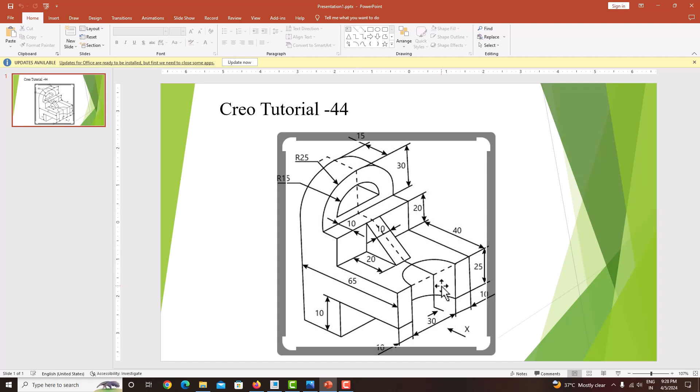While modeling this component, I will start with the left side sketch, then extrude it up to a length of 50. Then I will remove the material here, then create this rib. Finally, I will remove material from this one and this one. After doing these steps, we will get a model like this.

This is the final model. Now we will learn how to create this model using Creo Parametric.

Just go to file, close, new, part, solid, untick 'use default template', provide a name, save, OK. Now our dimensions are in mm, so choose the mm template: mm part solid absolute, save, OK.

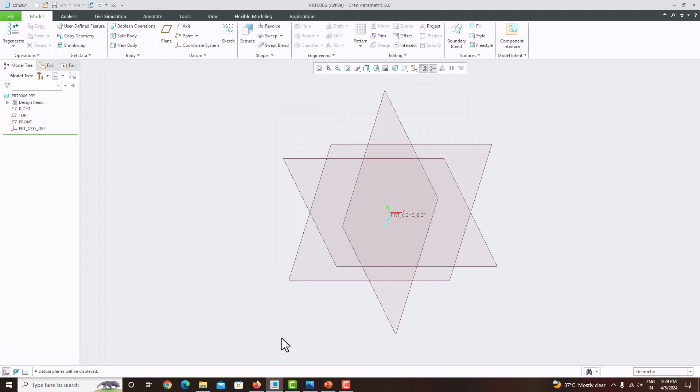Switch on all the planes. For easy drawing, I'm just going to keep it like this. First, I'm taking the front plane, sketch view.

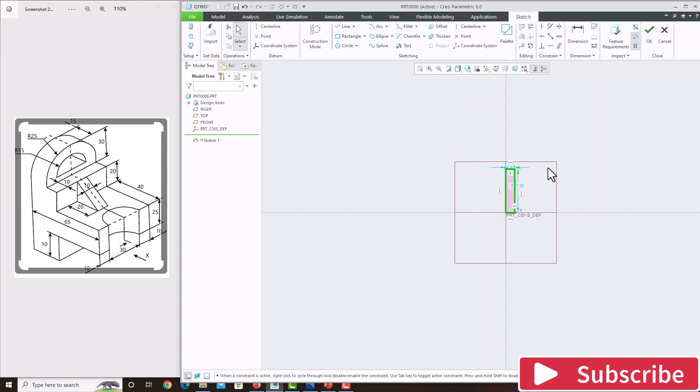Now I will start with the rectangle, take the corner rectangle, put it like this. The total height has to be calculated from here: 30 plus 20 plus 25 plus 10. So just add it like that: 30 plus 20 plus 25 plus 10.

The height is 85, and the width also we have to calculate. The total is 65. From 65 just minus 40, that is 25.

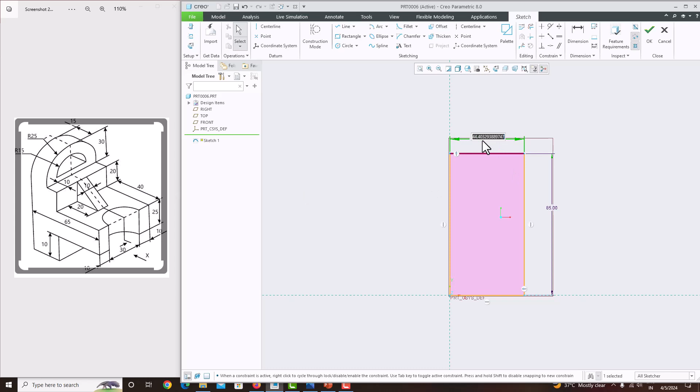Now we just want to put this rectangle, take this rectangle, don't constrain with anything, just draw it like this. Here the height is 10, this height is 10, and the total length, as we know, is 65. From here to here it is 65, and this thickness is 25.

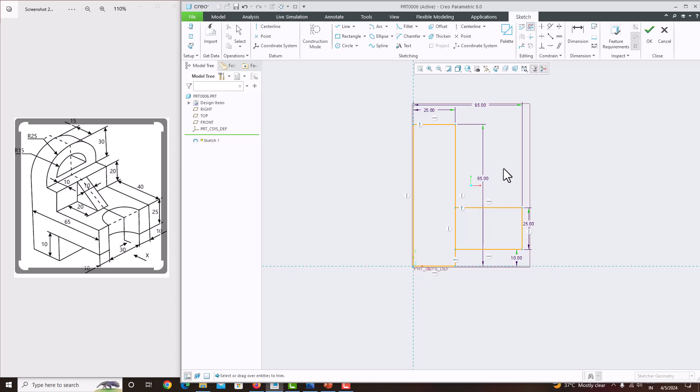All the dimensions I have specified now. Just remove the unwanted edges by using delete segments - delete it here and delete it again. This is our final sketch. Just say OK.

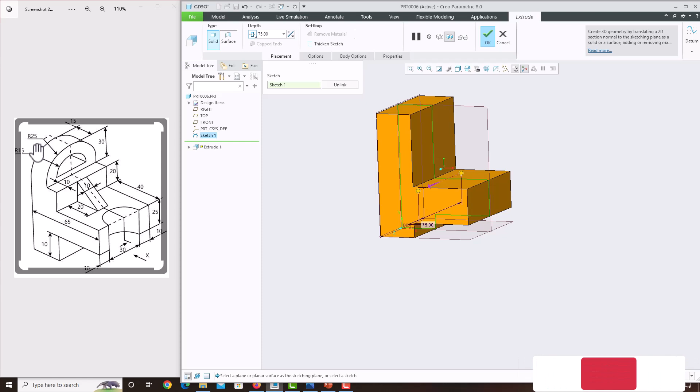Just go to extrude, make it symmetric. The total extrusion length: here you can see 10 plus 30 plus 10, that's totally 50. Here also you can get the radius is 25, meaning the diameter is 50. The extrusion length is 50, just say OK.

Next, we want to remove this material here. Select this mid plane, sketch view, go to reference, take those two as reference, then close it. Take a rectangle and just put it like this.

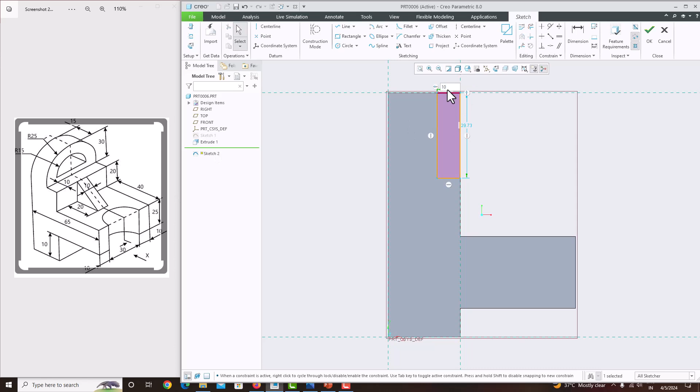The total height we want to remove is 30, and the thickness is 10. This one is 10 and this one is 30. Just say OK. Extrude, symmetric, go to option, set this to next and this also to next. Just say OK. Now we have created this cut.

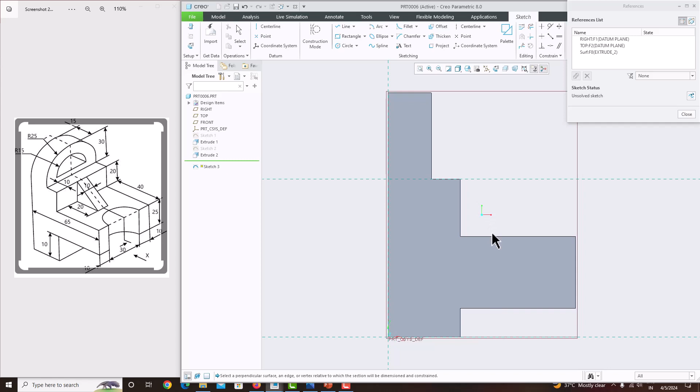Then we'll create this rib. Select this mid plane, sketch view. Now go to reference, take this line and this line as reference, this line also, then close it. Take a line, connect it here, and put it somewhere here.

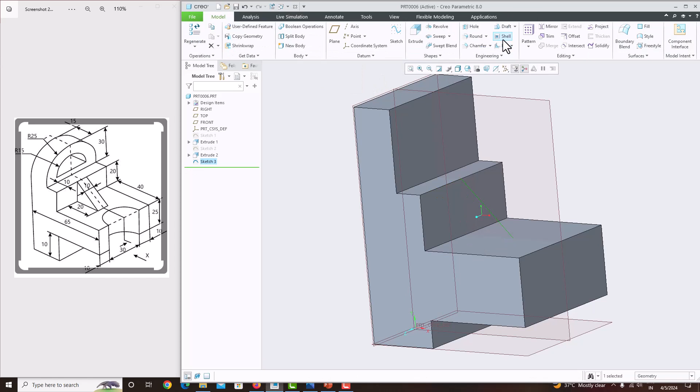Here they have given a dimension of 20. Go to dimension, from here to here it is 20. Just say OK. Cancel. So make sure you have selected the sketch, go to rib, profile rib, change the direction, the thickness is 10. Just say OK. Now we have created this.

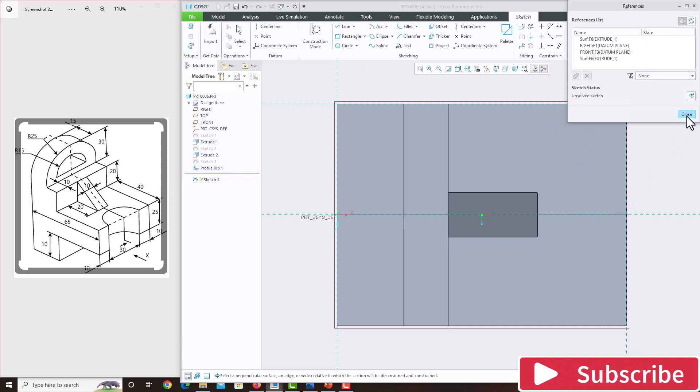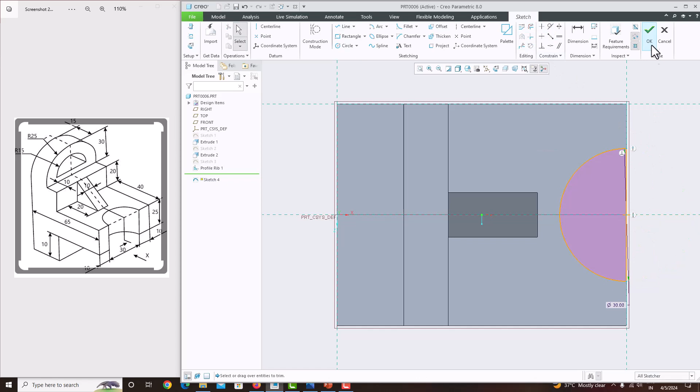Now we'll remove material here. Select the surface, sketch view, take a reference of this edge and this edge, then close. Take a circle, and the diameter of the circle is 30. Then we just take a line, connect this line, go to delete segments, delete it here, just say OK. Extrude, change the direction to next, just say OK.

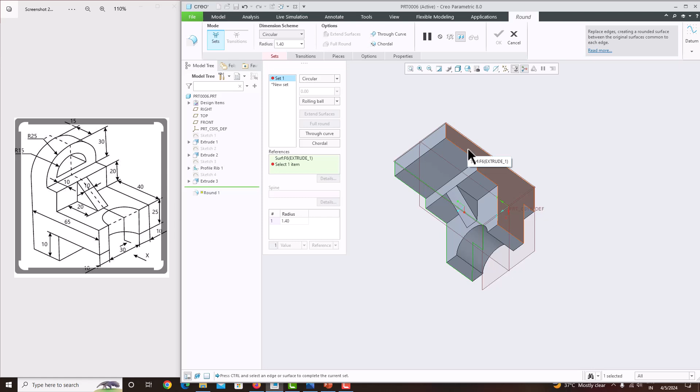Now here we have done. Then we have to do here - this one is the round, we can use it. Just take this round, select this surface, and press and hold the Control key, then select this surface and this surface. Now we got this round.

Then just select the surface, sketch view. Here we want to remove a semicircle cut. Take this as a reference, then close it. Now take a circle. Now the radius of the circle is 15.

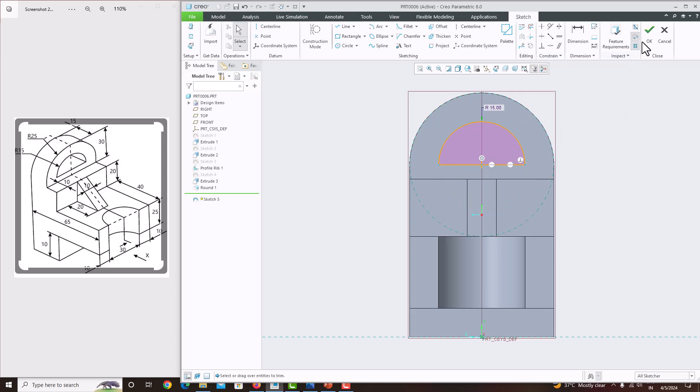Just go to dimension - the radius is 15. Now just take a line, connect it like this. Go to delete segments, remove this one. Just say OK. Extrude, change the direction, make it to next, material removal, say OK. Now the complete model is done.

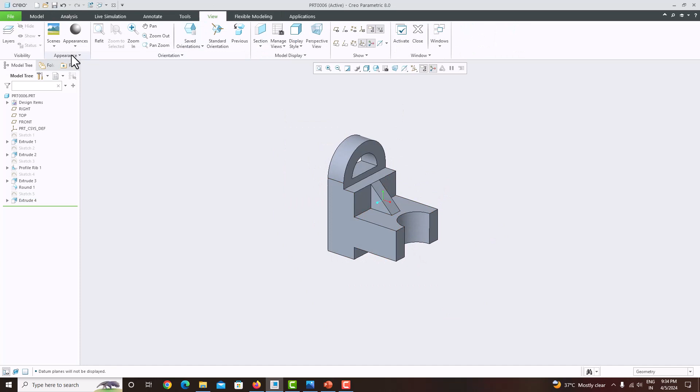Just go to hide all the planes and axis, standard orientation. In this way we have modeled it. To change the color, go to view, appearance, give some color, apply to the part, say OK. Like this we can apply any color.